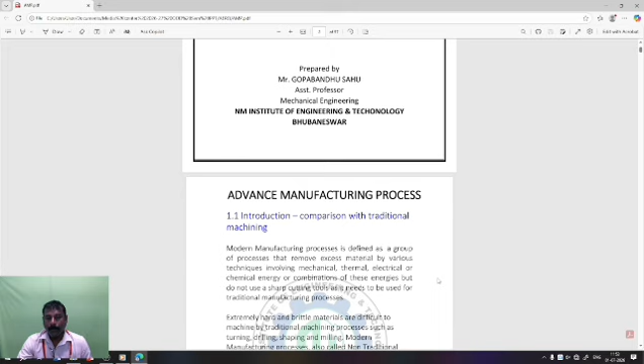Extremely hard and brittle materials are difficult to machine by traditional machining processes such as turning, drilling, shaping and milling. Modern manufacturing process, also called non-traditional or advanced manufacturing process, are employed where traditional machining processes are not feasible, satisfactory or economical due to special reasons outlined below.

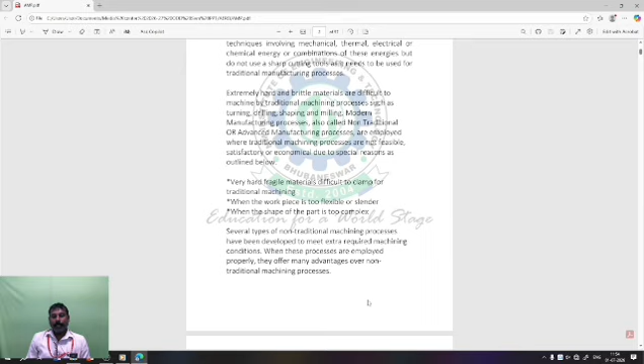Very hard materials are difficult to clamp for traditional machining, when the workpiece is too flexible or slender, when the shape of the part is too complex. So several types of non-traditional machining processes have been developed to meet extra required machining conditions. When these processes are employed properly, they offer many advantages over traditional machining process.

Definition: the machining process is called non-traditional if its material removal mechanism is basically different than those in the traditional process. For example, a different form of energy instead of a tool which is in physical contact with the workpiece is applied to remove the excess material from the work surface or to separate the workpiece into smaller parts.

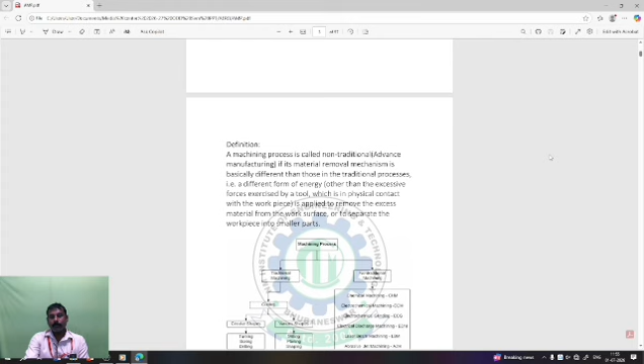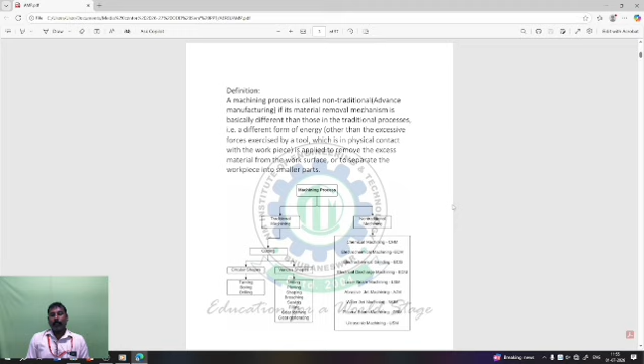There are two types of machining processes: the first is traditional machining and the second is non-traditional machining process. First we discuss about the traditional machining process, which is a cutting process.

Circular shape processes include turning, boring, drilling - mostly three types used for circular shapes. Various shapes processes are milling, planing, shaping, broaching, filing, gear forming, and gear generating. These are the various shape cutting processes.

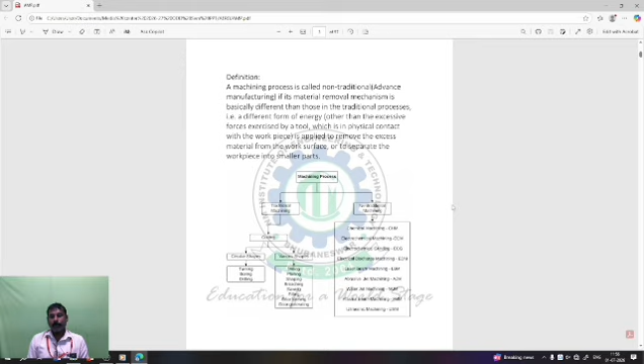Non-traditional machining includes chemical machining process, electrochemical machining process, electrical discharge machining, laser beam machining process, abrasive jet machining process, water jet machining process, plasma beam machining, and ultrasonic machining process. These are all the non-traditional machining processes.

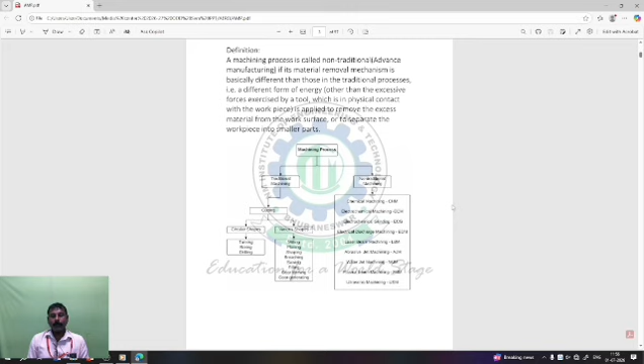Now comparison with the traditional process. Non-traditional processes are mostly based on three categories: first is mechanical, then thermal, then chemical and electrochemical process.

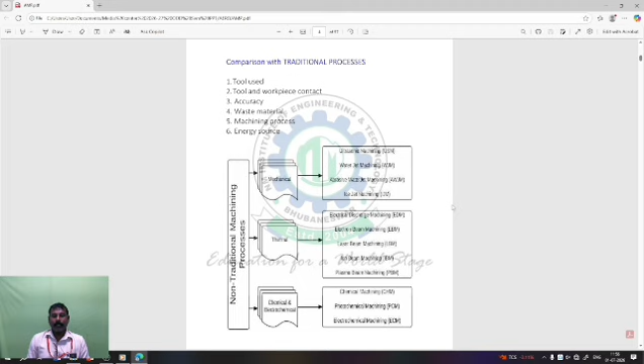Mechanical process includes ultrasonic machining, water jet machining process, abrasive water jet machining process, and ice jet machining process. Thermal energy is used in electrical discharge machining, electron beam machining, laser beam machining, ion beam machining, and plasma beam machining process. These processes are also used in thermal process.

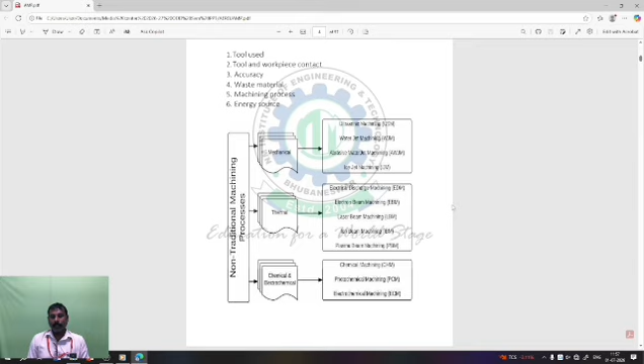Chemical and electrochemical process has three types: chemical machining process, photochemical machining process, and electrochemical process.

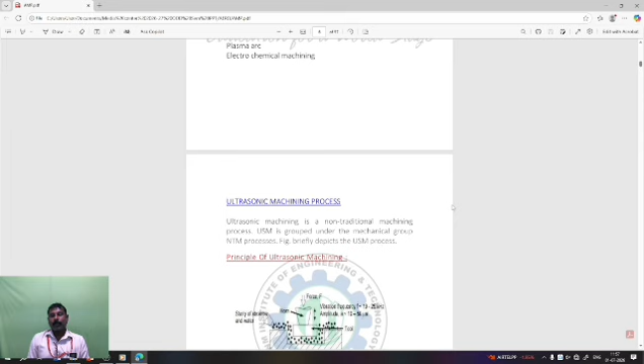Ultrasonic machining process is a non-traditional machining process. USM is grouped under the mechanical group. In ultrasonic machining, a tool of desired shape vibrates at an ultrasonic frequency level of 19 to 25 kilohertz, with an amplitude of around 15 to 50 micrometers.

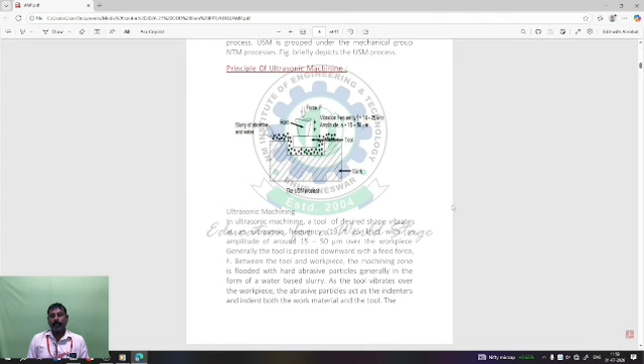Over the workpiece, generally the tool is pressed down with a feed force. Between the tool and workpiece, the machining zone is flooded with hard abrasive particles, generally in the form of a water-based slurry. As the tool vibrates over the workpiece, the abrasive particles act as indenters and indent both the work material and the tool.

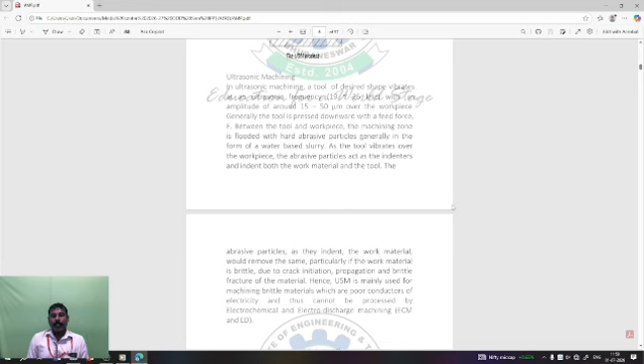As the abrasive particles indent, the work material is removed, particularly if the work material is brittle, due to crack propagation and brittle fracture of the material. Hence, USM is mainly used for machining brittle materials which are poor conductors of electricity and thus cannot be processed by electrochemical and electro discharge machining.

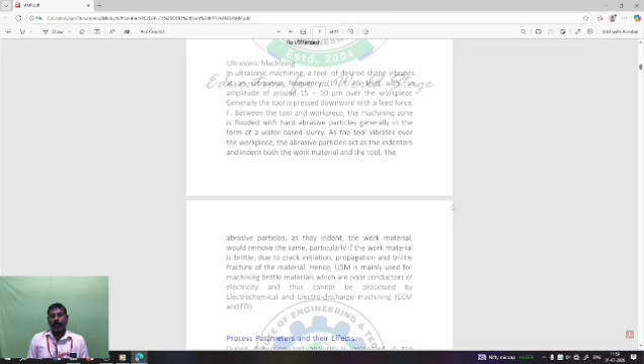The process parameters and their effects are discussed and analyzed, presented in the previous sections. The process parameters which affect ultrasonic machining process have been identified and are listed below along with the materials.

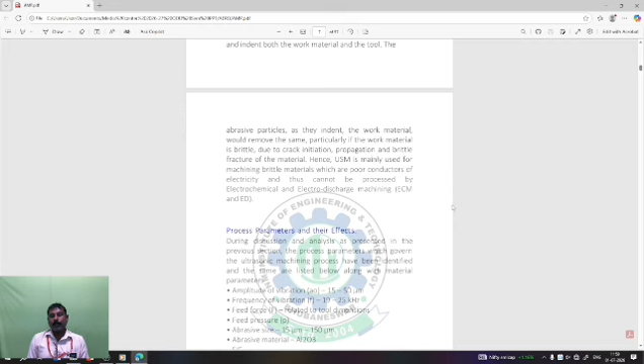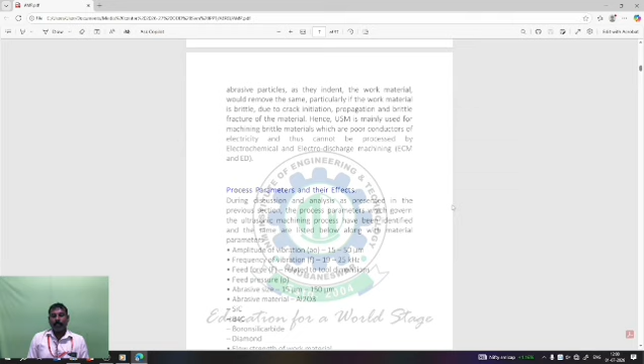The parameters are: amplitude of vibrations, 15 to 50 micrometers; frequency of vibrations, 19 to 25 kilohertz; feed force related to tool dimensions; feed pressure; abrasive size, 15 micrometer to 150 micrometer; and abrasive material, Al2O3. These are the parameters of the abrasive materials.

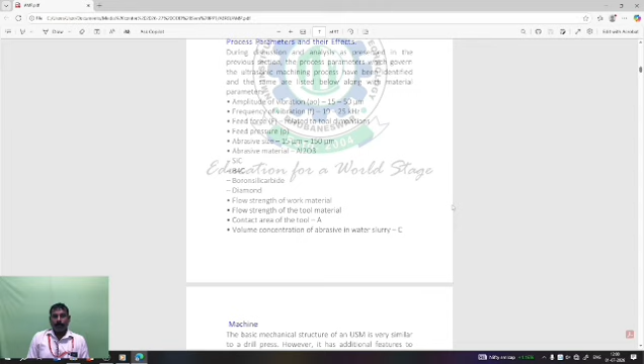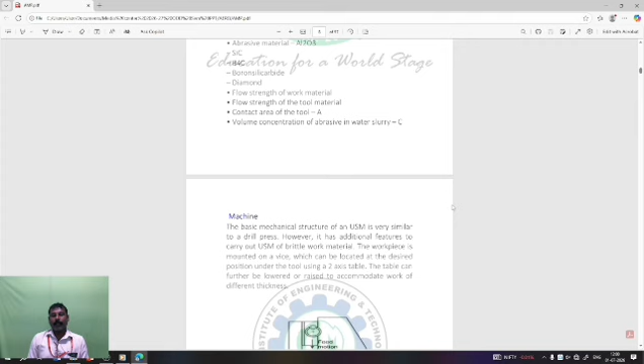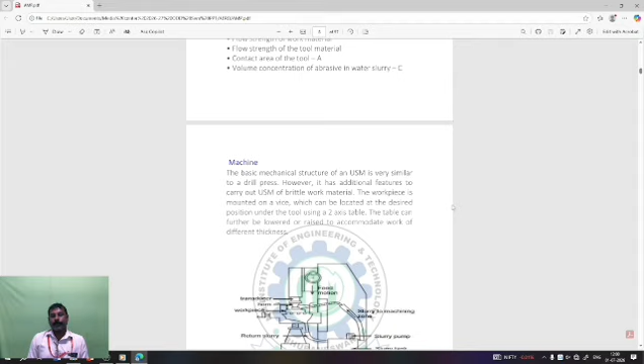Next, the machining process. The basic mechanical structure of a USM is very similar to a drill press. However, it has additional features to carry out USM of brittle work material. The workpiece is mounted on a vise, which can be located at the desired position under the tool using a 2-axis table. The table can further be lowered or raised to accommodate work of different thicknesses.

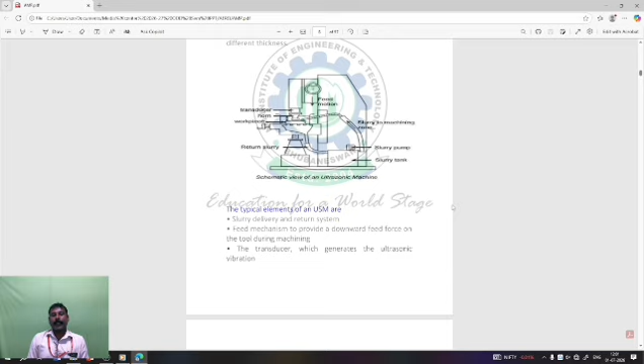The typical elements of the USM are: slurry delivery and return systems, feed mechanism to provide a downward feed force on the tool during machining, and the transducer, which generates the ultrasonic vibrations.

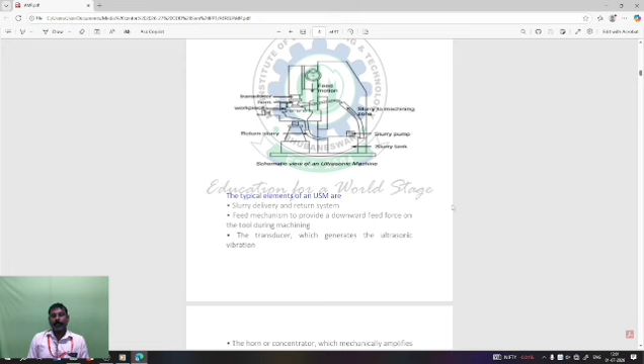The horn or concentrator mechanically amplifies the vibrations to the required amplitude of 15 to 50 micrometers and accommodates the tool at its tip. The ultrasonic vibrations are produced by the transducer. The transducer is driven by a suitable signal generator followed by a power amplifier.

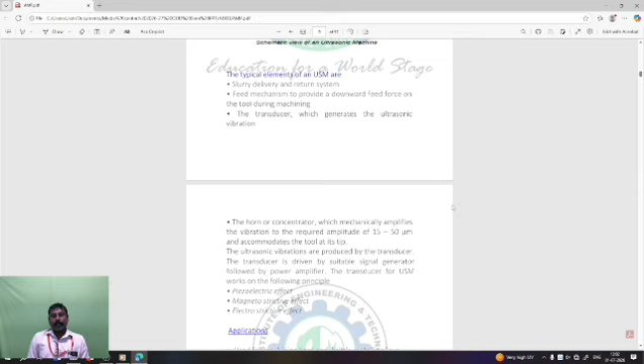The transducer for USM works on the following principles: first, piezoelectric effect, then magnetostrictive effect, then electrostrictive effect.

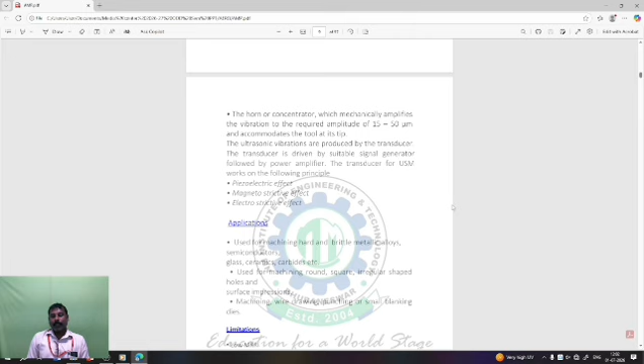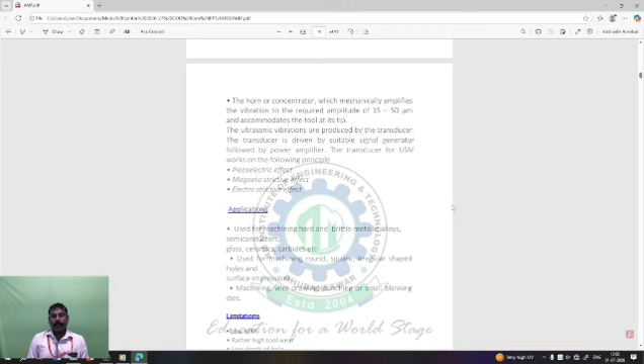The application is used for machining hard and brittle metal alloys, semiconductors, etc. It is used for machining round, square, and irregular shaped holes. It is also used in machining wire drawing, punching, or small blanking dies manufactured by this process.

Next, electric discharge machining. Electrical discharge machining is the process of metal removal from the work surface due to erosion of metal caused by electric spark discharge between two electrodes, one cathode and one anode.

The working principle consists of an electric power supply, the dielectric medium, the tool, workpiece, and servo control. The workpiece is connected to the positive terminal and the tool to the negative terminal of the DC power supply. An air gap of 0.005 to 0.05 mm is maintained between the tool and the workpiece.

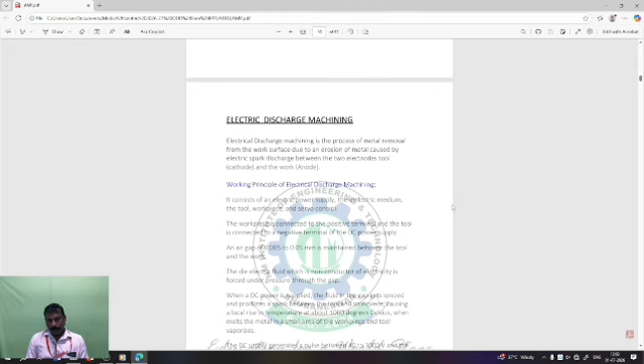The dielectric fluid, which is a non-conductor of electricity, is forced under pressure through the gap. When DC power is supplied, the fluid in the gap gets ionized and produces a spark between the tool and workpiece.

The temperature reaches about 10,000 degrees Celsius, which melts the metal in a small area of the workpiece and tool. The DC supply generates pulses between 40 to 300 volts, and a frequency of spark at the rate of 10,000 sparks per second can be achieved.

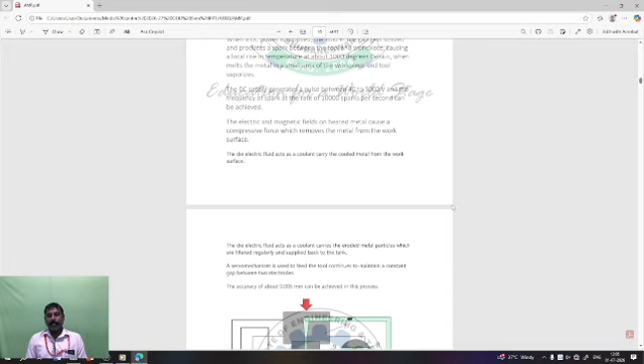The electric and magnetic field on the heated metal has a compressive force which removes the metal from the work surface. The dielectric fluid acts as a coolant, carrying away the molten metal from the work surface. The servo mechanism is used to feed the tool continuously to maintain a constant gap between the two electrodes. An accuracy of about 0.005 mm can be achieved in this process.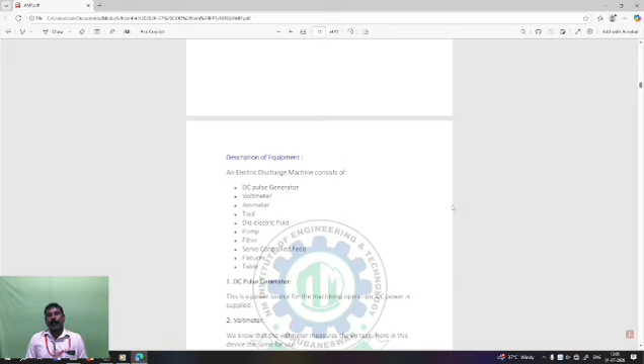An electric discharge machine consists of a DC pulse generator, voltmeter, ammeter, tool, dielectric fluid, pump, filter, servo control feed, etc. These are also components used in electric discharge machining.

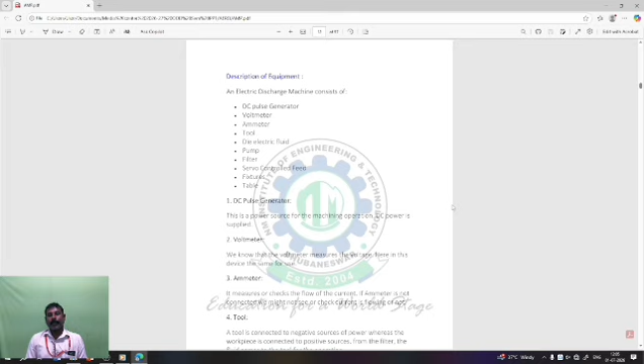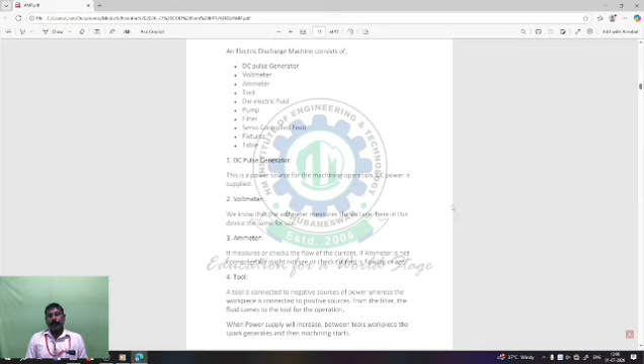The DC pulse generator is the power source of the machining operation; DC power is supplied from it. The voltmeter shows the voltage used in this device. If the ammeter is not connected, we cannot check whether current is flowing or not.

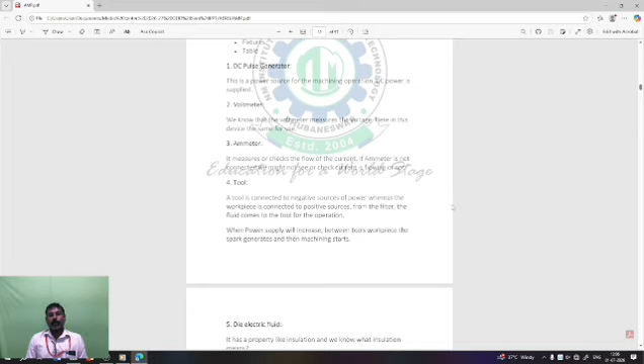The tool is connected to the negative source of power, and the workpiece is connected to the positive source. Fluid comes to the tool through the filter for the operation. When power supply increases between tool and workpiece, the spark generates and machining starts.

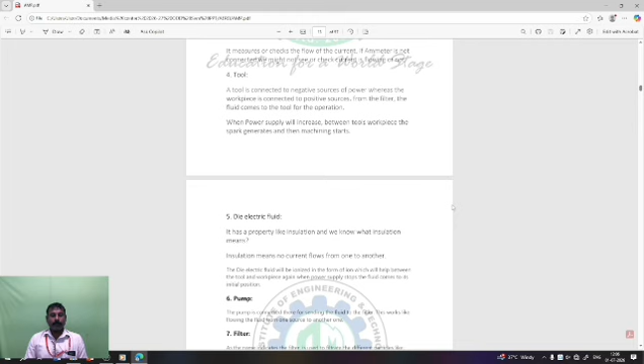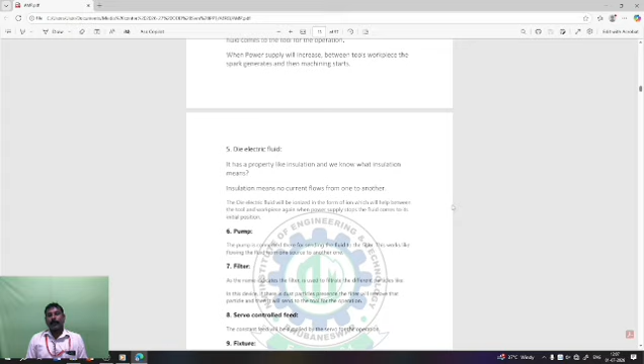The dielectric fluid has a property like insulation, meaning no current flows from one part to another. The dielectric fluid will be ionized, which helps conduction between the tool and workpiece. When the power supply stops, the fluid returns to its initial position.

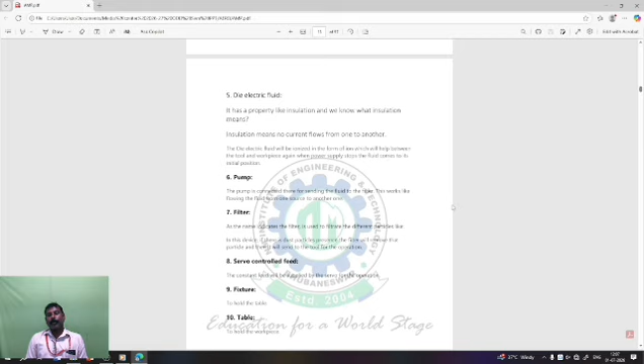The pump sends the fluid to the filter, moving the fluid from one source to another. The filter removes dust particles present in the fluid and sends it to the tool for operation. The servo controlled feed supplies a constant feed for the operation.

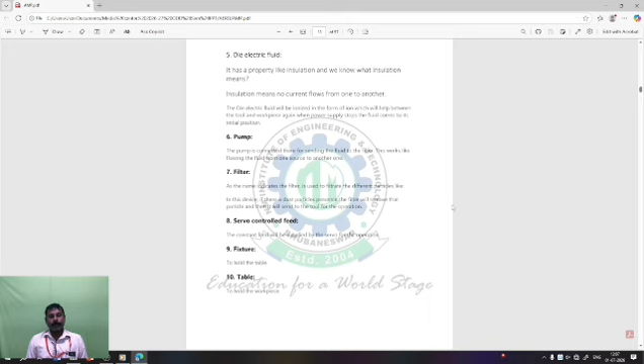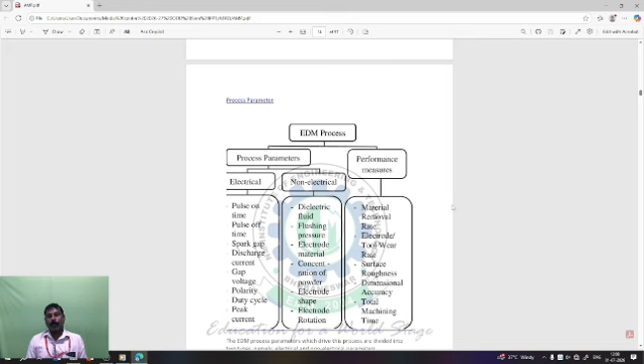Next, the various parameters for the EDM process: process parameters and performance measures. First we look at process parameters, electrical and non-electrical. Electrical parameters include pulse on time, spark gap, discharge current, gap voltage, etc. Non-electrical parameters include dielectric fluid, electrode material, electrode shape, and electrode rotation. Performance-wise, we consider material removal rate, electrode tool wear rate, surface roughness, dimensional accuracy, and total machining time.

The EDM process parameters that drive these processes are divided into two types: electrical and non-electrical. The major electrical parameters are discharge voltage, peak current, pulse duration, and pulse intervals, along with electrode gap. Important non-electrical parameters include the flushing of the dielectric fluid, workpiece rotation, and electrode rotation, etc. These parameters are discussed below.

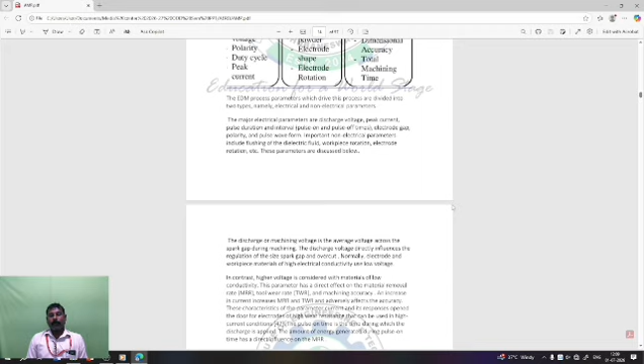The discharge or machining voltage is the voltage across the spark gap during machining. The discharge voltage directly influences the size, spark gap, and overcut. Normally, electrode and workpiece materials of high electrical conductivity use low voltage; in contrast, high voltage is considered for materials of low conductivity.

This parameter has a direct effect on the material removal rate, tool wear rate, and machining accuracy with increasing current. These characteristics of current and its response open the door for electrodes of high wear resistance that can be used in high current conditions.

The pulse on time is the time during which the discharge is applied, producing the amount of energy generated during the pulse. Increasing the discharge energy by applying a larger pulse on time also increases the material removal rate. The pulse off time is the time during which there is no discharge.

The polarity in EDM depends on many factors including electrode and workpiece materials, current density, and pulse length. Either the electrode or the workpiece has positive charge polarity, and the other has negative charge polarity.